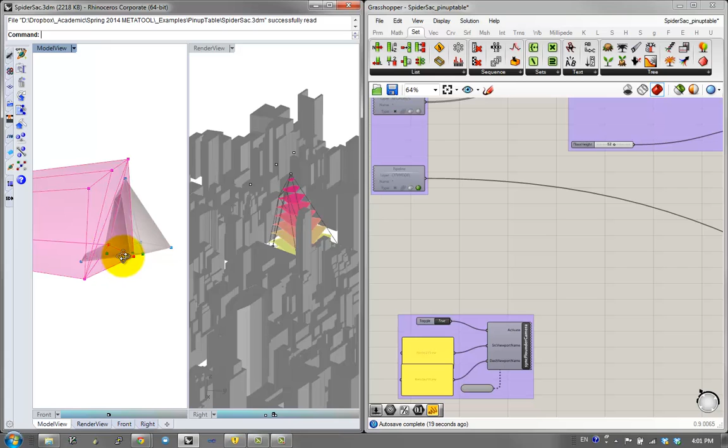Okay, so for this what I'm going to talk about is, I'm going to make a tool that's entirely for representational purposes. And I'm invoking a little bit this kind of pin-up presentation or table in which many iterations are placed in comparison to each other so that you can kind of compare and contrast and display your process. On one hand, it's a very simple tool conceptually.

It's a tool to essentially bake your progress, but it's also a very helpful tool in terms of representation. And since this set of videos is entirely about representation or harnessing the power of representation within the creation of tools, I think it's especially relevant and kind of a great base with which you can work and use your tools.

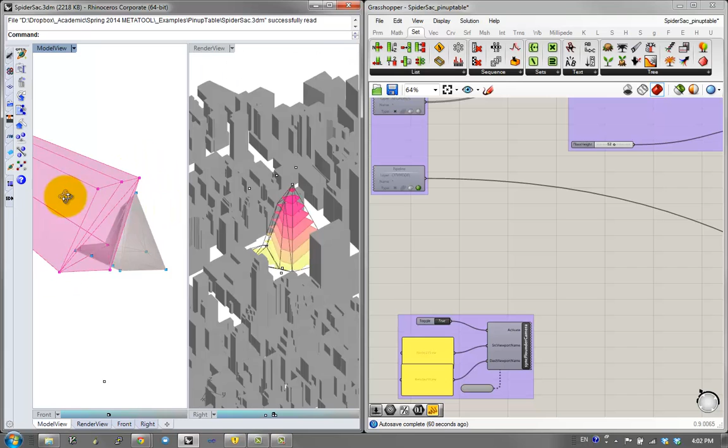Okay, so I'm starting from the SpiderSac example, which is an example that uses geometry to kind of carve out two volumes from each other, do some analyses. But really, what I want to do is to create a way in which I can work with a lot of iterations. Because the problem with this is that I can do a lot of different versions, but I don't know exactly what I've made, and it'd be great to compare and contrast.

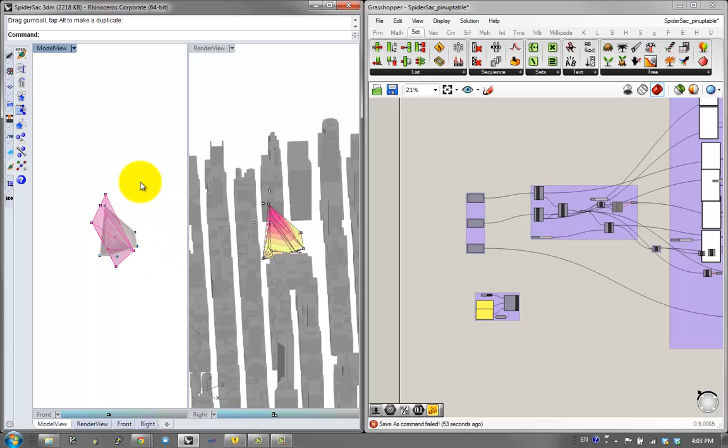So what I want to do is I want to make a button within the interface of Grasshopper or Rhino, and if I click on the button, I want to be able to have both the geometry and any analysis placed on a table. And if I click on another button, more geometry will be placed on a table. But I don't want to have to go and move anything or fiddle around with anything. I just want to be able to kind of play around here, make, place, make, place, make, place, and then later go to this table and kind of see what exactly I've been doing.

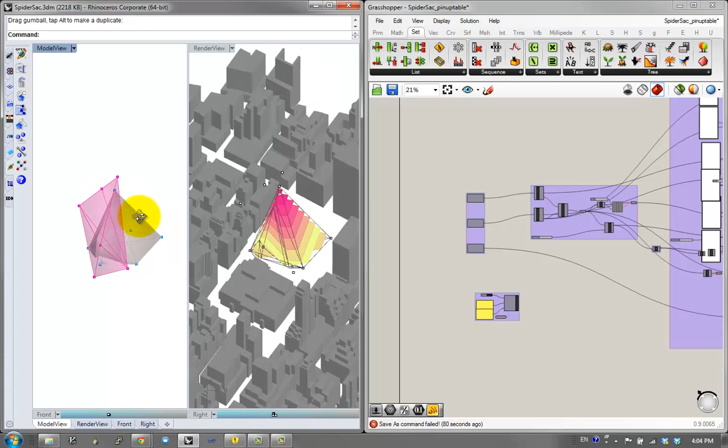Alternately, what I could also do is I could, in fact, have these objects already placed on a table. So I could get rid of the city model here, and I can kind of move this geometry, place it, and then move to another portion of the table, place it. And that's actually the version I'm going to be showing here. It involves a little bit more interesting work with the camera, but I think it'll be very helpful, and it'll also kind of show you an insight into how you can use the Flounder camera control as a tool to kind of manipulate geometry in new ways.

Because here what you're seeing is I'm looking at the same point in space, I'm looking at the same geometry and just hiding and showing things. In this example, I'm actually going to be showing two different locations in space that are in separate areas but are made to look similar. That's a little vague, so let's actually go on to executing what I'm talking about.

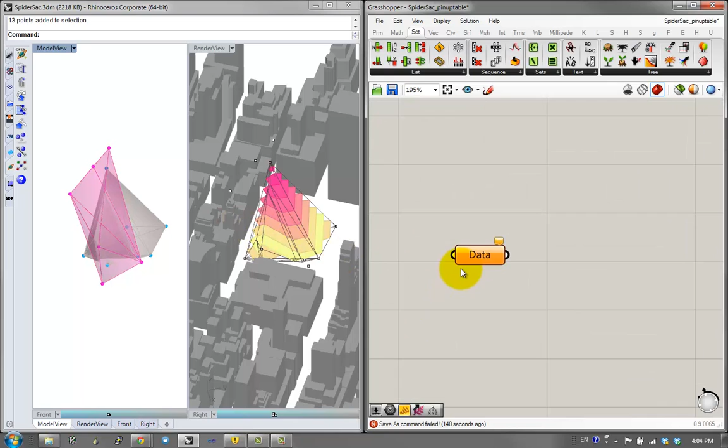So first of all, I'm going to write some pseudocode. Again, I think this is great practice, and to think about what I want to do. So I want to be able to define a table area. And then I want to say, okay, define kind of the spacing of my table. Now this may be random. This may be automatic, but let's just say that I can define a spacing and it can define a grid. So define spacing for my table to create a grid.

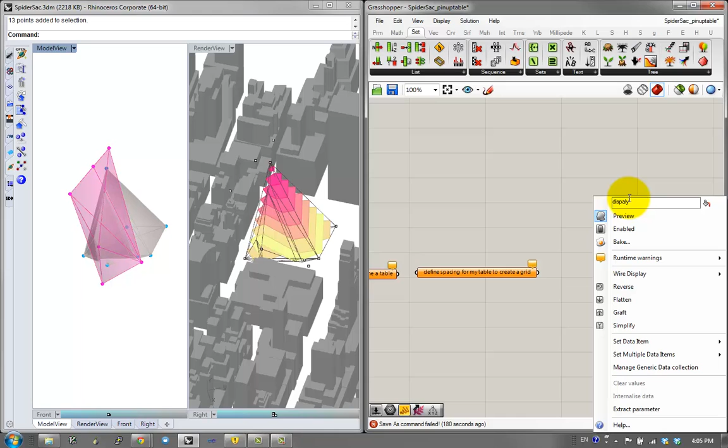And I also want to then display. I want to display the geometry or analysis or the tool results on the table. I want to have a button that bakes geometry. Create button that bakes geometry. And let's see, I want to define a table, define a spacing, display the tool results on the table, and to create a button that bakes geometry.

But moreover, I want to display the tool results on the table, moving the results around like separate objects. Great. So this is a little vague, but we'll get into exactly what that means in a second. So first of all, I want to define a table.

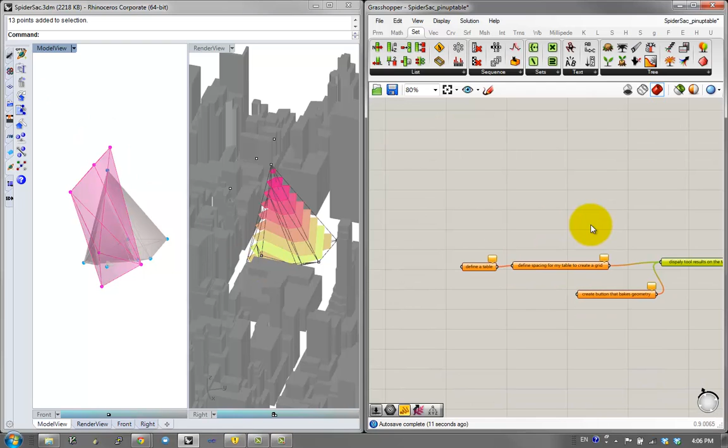Okay, so I'm in the SpiderSac world, right? And I'm going to, for the time being, bring up the viewport view so I can see what's going on. So I'm in the SpiderSac world, and I'm actually going to make a table way far away over here. And as you'll see later, it doesn't really matter where the table is. It just matters that I can't see it. So here's my table, let's say. And just to be tongue-in-cheek, I will make an actual table.

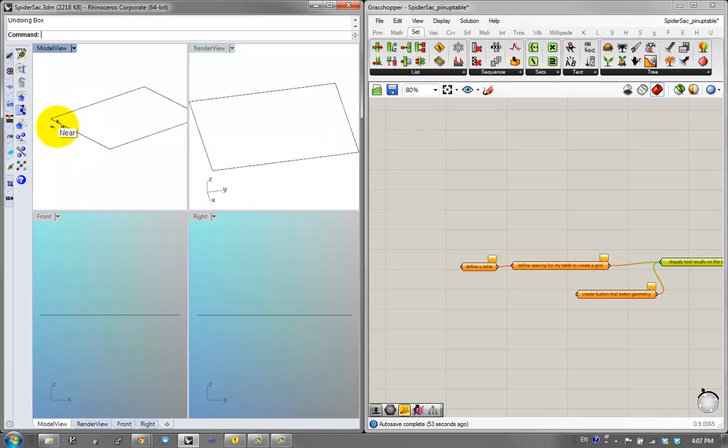Or I'll just make a box. This will just be a podium, perhaps. Or actually, you know what? I will actually make a table. So I'm actually going to make a table. It's a little bit tongue-in-cheek, but part of the point I'm trying to make is that the representation of what the tool does is very important, and in some ways will affect the way you design.

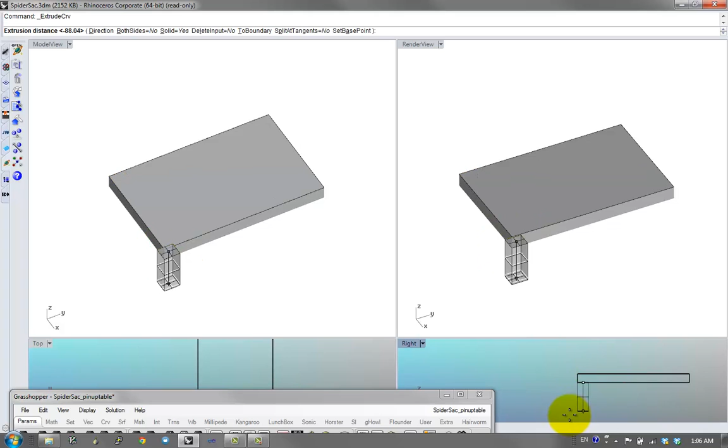So creating this table on which we have our geometry is actually a good way not just to showcase what we've done, but also, while we're designing, to tell us more about what we design and how we can design. In the way that any pinup or any crit in general in studio is a good way to influence design. It's not just a representation, or a unidirectional expression of information. It's a way to kind of resynthesize information.

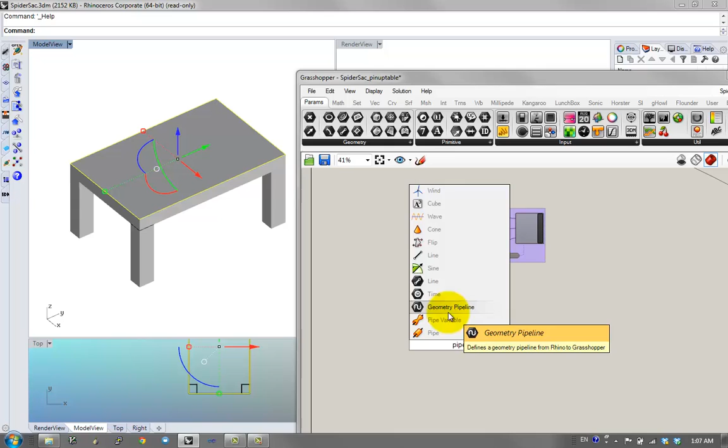So I've created a table, and the table is just for display purposes, really. And I've also created this curve, and I've created a layer called table. What I'm going to do is grab this top surface, or this curve, with a pipeline object, geometry pipeline, and I'm going to say grab the layer table. I'll specify that I'm using curves.

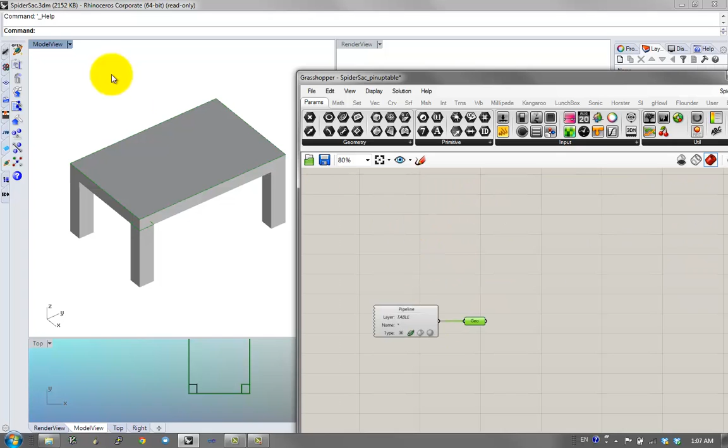So when I pipe it into a geometry component, let's see. Oh, I think table is in all caps. You can see I'm grabbing the table. That's great. So in some way, that's akin to part of the first process in our pseudocode, which is to define a table and define spacing for my table to create a grid. Display tool results on the table, and use that together with the base geometry.

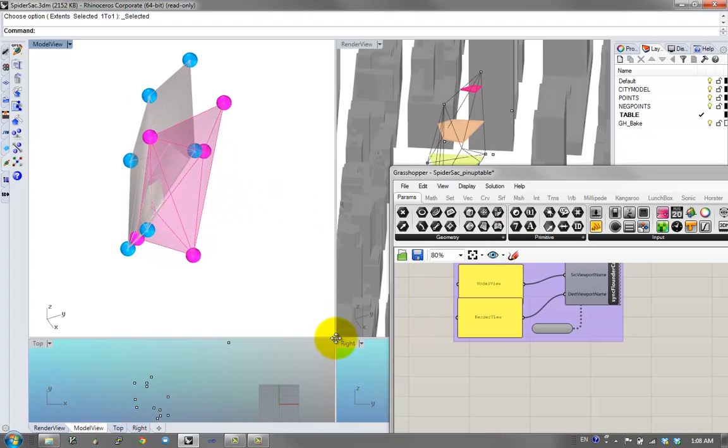Now I'm actually going to jump ahead, because it's not always necessary to go in order of the pseudocode. I'm going to go into the last one and talk about what it means to display the tool results, so that you can see what exactly I'm talking about when I talk about using a table or a pinup table. So if I go back, I'm going to turn the camera syncing on by turning on the timer. If you go back to this example of using the Flounder camera, I want to emphasize again how effective having this split camera is.

It's not just a way to show information. It actually lets you use Grasshopper like a tool, because you're not hiding and showing preview objects or custom preview components. You can actually edit geometry while you're looking at the end effects. And I noticed that some of you might have been using only one view without implementing the split view, and I'd encourage you to try to implement it, because it actually does change your workflow.

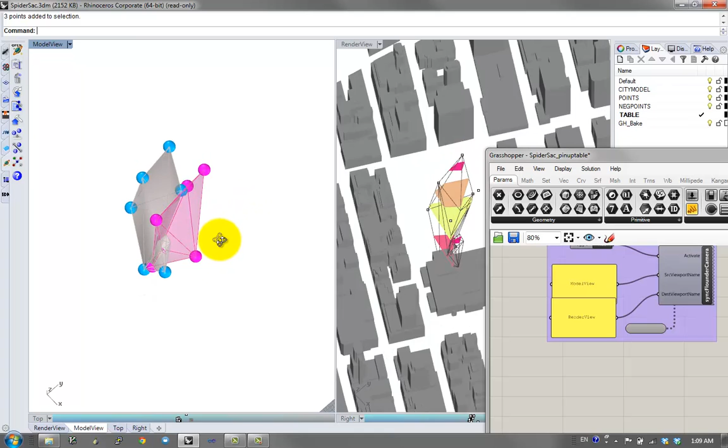In any case, the Sync Flounder camera, as you know, syncs between two views; it grabs information from here and implements it into here. And we can also replicate this functionality by using the Flounder components that I've created. There are also two other components: get camera and set camera. And these two components, you can chain them together to do the same thing. So I'm actually going to delete this component here and try to implement this again.

So what getFlounderCamera does is, given a Boolean and given the name of a viewport, it'll give you this information on the right, which is the location of the camera, the target of the camera, the lens of the camera, the focal length, and up. The location is where you are, so it's the location of the camera from your vantage point. The target is what you're looking at; you can see the dot here. It's almost always in the center of the screen because it's the center of what you're looking at.

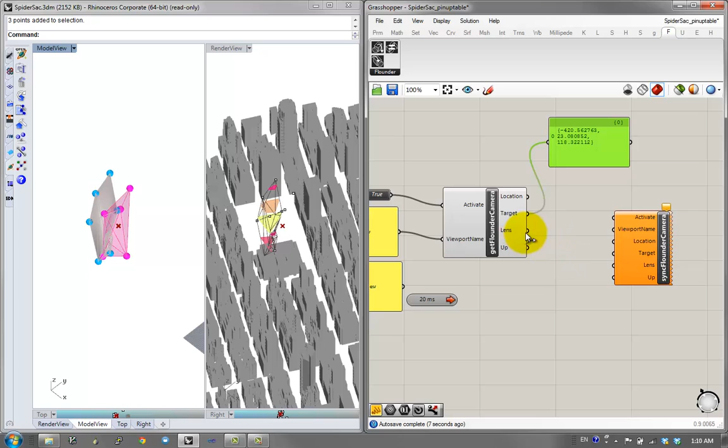The focal length, if you know anything about photography, is using the focal length of 35mm cameras as a model. The long and short of it is that the larger the focal length, the more orthogonal or axonometric-like objects will appear. If I use dolly zoom in Rhino to change the perspective and have these distortions, the focal length will become very small. And if I plug the timer into here, you can see that the focal length is like 1.25 now.

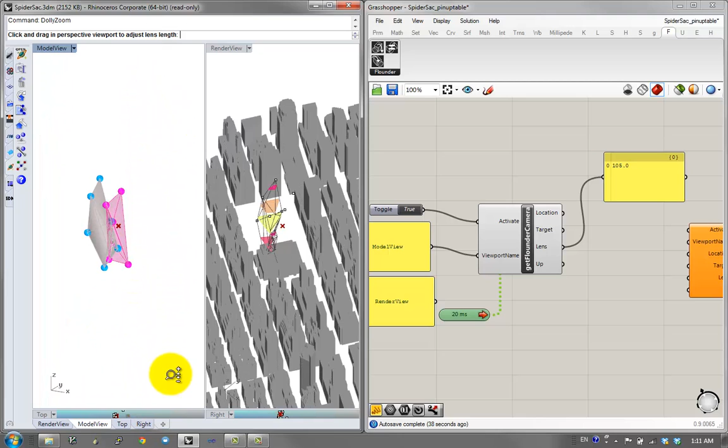So the smaller the focal length, the more distorted or the more wide angle you get. And the up is the up direction of the camera. Now, sync Flounder camera is the opposite of that, as you can imagine. I'm going to connect this to the timer, so this also updates.

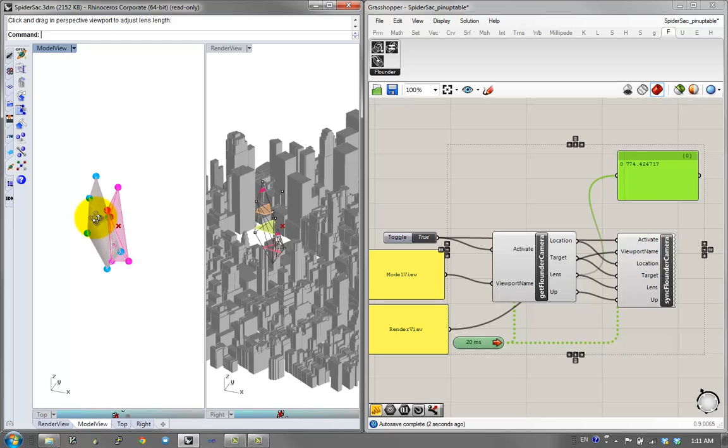If I give it a Boolean, and if I give it a viewport name, and if I plug in all of these variables into here, then it'll take this information and sync this viewport to match this information. So now that I've taken the information from model view and plugged it into the camera information from render view, you can see it's together. And this is replicating the functionality of the sync Flounder camera up above.

Now I think there's a small bug in that this appears to say sync Flounder camera. It really means put Flounder camera, and I'll fix that in a future release. Now one thing I want to talk about, and this is the point of this tutorial, is I can also move where the camera is pointing at and where the camera is looking from in order to sync the movement of the viewport while looking at a different location. And I'll show you what that means.

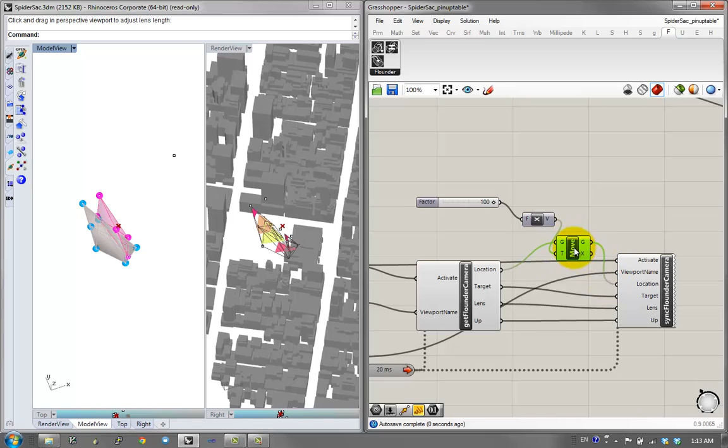Let's say I'm going to move everything 100 units in the X direction, and I'm going to plug this into a move component. I can move the location 100 units to the right, and I can plug it into here. And I can also move what it's looking at 100 units in the X direction and plug it into the target. And you can notice that as I move this point, my camera on the right-hand side shifts. But if I orbit, I'm orbiting around this new point on the right.

And so I'm going to modify my slider here to say 500 so that I can move it a bit more so you can get an even better understanding. So you notice that on the right-hand side, I'm orbiting around this new point even though my geometry is around the old point. Now the reason why this is interesting is that the camera is not the only thing I have to move. I can in fact move this geometry over here, and I can also move the mesh over here too for many reasons.

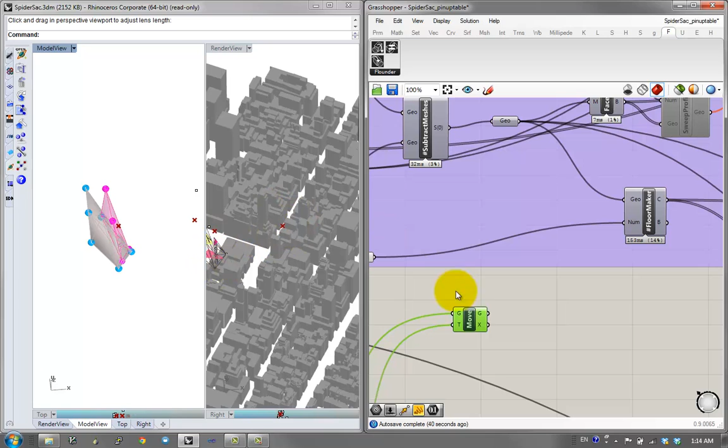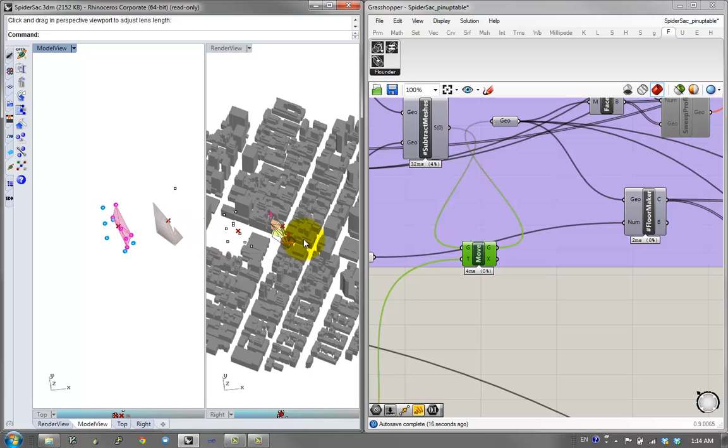It's over here. Looks like there's a little bug I'm going to fix. I think it's because the custom preview object is showing the preview in the wrong location. Or no, it's showing it in the right direction, but it should be showing it over here and not moved. So I'm just going to go in and edit that. Excellent, so I fixed it.

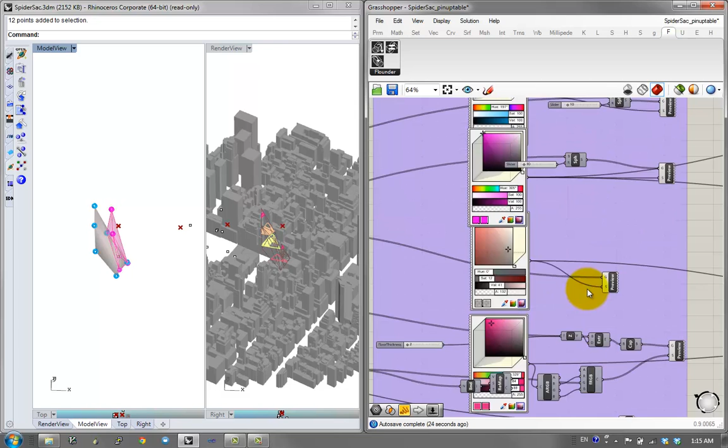So now what does this mean? It means that I'm selecting these points, but really they're over here. But what I'm looking at and what I'm orbiting around... and I'm also going to hide the city just for a moment, which I think is these items. No. Okay, there are these items down here. I'm going to hide this preview object.

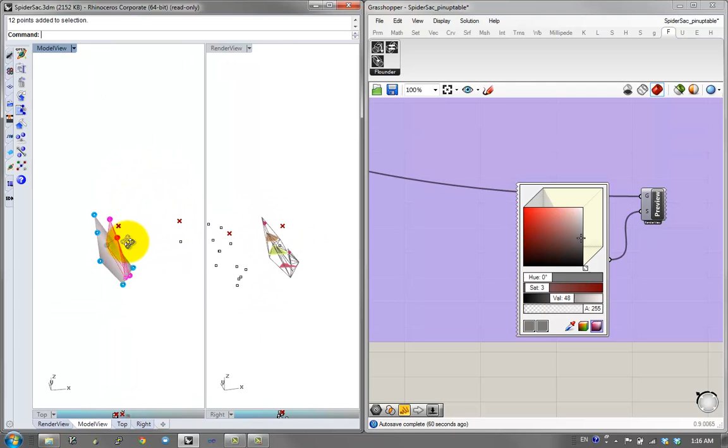Okay, so if I'm rotating around, it looks like nothing has changed, but when I highlight these objects, these points are actually in XYZ space in a different location, or this geometry has been moved, but it feels like it hasn't. And this is important because instead of having all this geometry move in the X direction by this many units, I can actually move them onto the table. I can move them to a far-off location. It'll still feel the same, yet I'll be operating on a different surface, which then lets me make copies or bake geometry.

So by now you should be able to understand that, and I'm going to show you this in a top view, in a plan view. So if I highlight these points, the points I'm highlighting are around here, but the geometry that I've created is offset. I hope that's pretty clear. Okay, great.

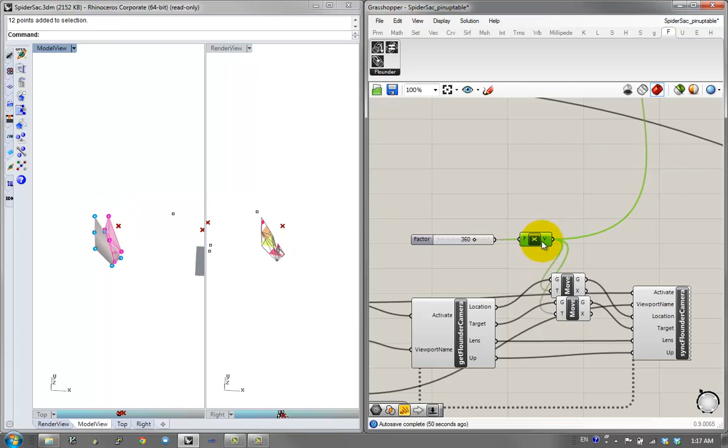So now what I'm going to do is the same operation, but instead of moving this to an arbitrary point, I actually want to move this onto the table, somewhere onto the table. So this is great, and I'm actually going to pause this, and this is kind of the displaying the tool results portion.

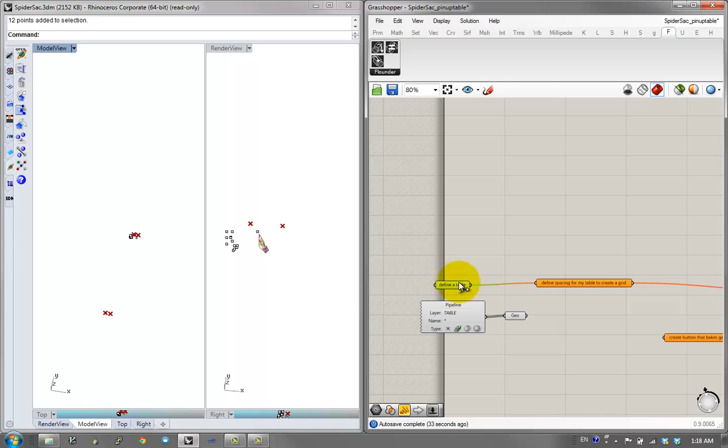So I'm going to pause this, and I'm going to go back to creating a grid upon the table. And I apologize for jumping around, but I think it's important to understand that I've created this aspect and I've created this aspect. So I'm going to actually move my pseudocode around to match. And now it's kind of a way of growing in both directions to try to figure this out so that I can use this object that comes later in order to connect with this object or component that comes earlier.

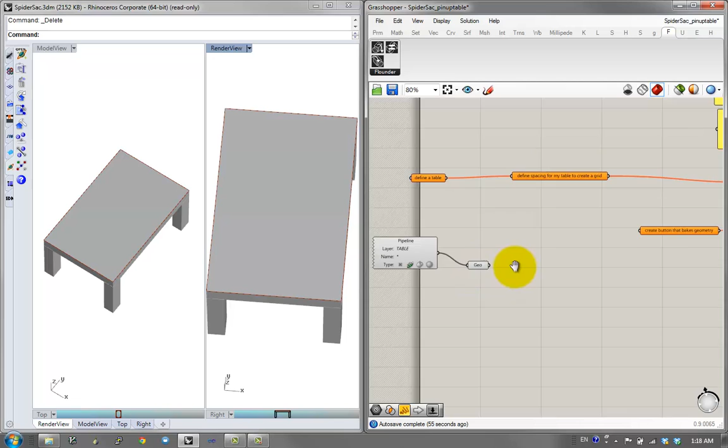So I'm going to go back to my table, which is a little hard to find, but it's out over here. Excellent. And if you remember, I had the pipeline grab the surface of the table. It looks like there's another curve here that I'm going to delete. Great. So I'm going to define my spacing for my table to create a grid. There's a few ways I can do this. I can divide a surface, and I'm actually going to use this. So this divide surface divides it into U and V

surfaces, and the U and V is that each surface has an internal orientation, so U and V axis, and it divides them along with these number of segments. Now I don't want an arbitrary number of segments. I want to get the dimensions of the surface and get a point grid of an ideal size. So I'm going to grab the dimensions of the surface. And this says your surface in one direction is 710, the other direction is 1100. And I'm also going to make a resolution slider. So maybe my resolution is like 80.

And I'm going to divide each dimension by 80, which gives me in one direction 8.88 and in another direction 13.85. Now I can plug these directly into divide, and Grasshopper is smart enough that because it knows I'm expecting an integer, it'll round for me. So depending on the resolution, I can change how many points I want. This is great. The other smart thing I could do is, if I'm using the analogy of a pinup table, I don't want my objects to be too close to the edge.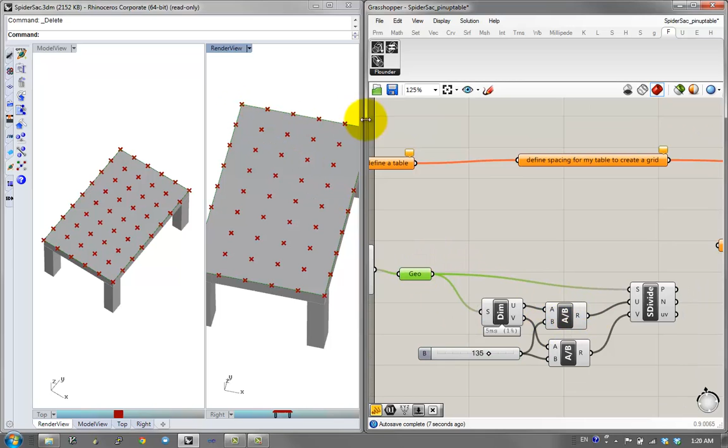So I could either think about removing all the points around an edge, which I could find the points closest to the edge and delete them. Or I could do a very fast thing: I could modify the initial line that's being used to instantiate the points. So I'm going to say offset. I'm going to grab that curve and offset by a little bit. Let's see. I'm going to offset it in the negative direction. So I could either modify this to be negative, or I could just use the negative component.

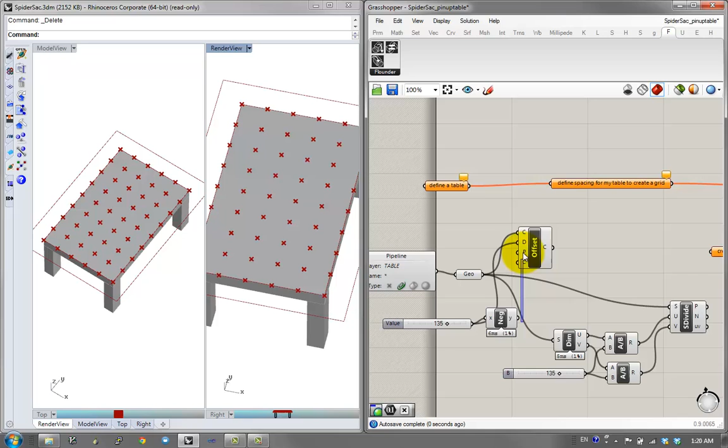Okay, so now I can say only make points inside of this. So I get an offset from the edges of the table. And then I can use this to subdivide and understand the dimensions. So that's pretty convenient. And let's say that's my rhythm, my spacing. So great. Now I've defined spacing for my table to create a grid. And I can cluster this, but I can also group this so that I can visually separate these out. And I'm going to hold Alt and move it out so I can stretch this separately so that the pseudocode makes more sense.

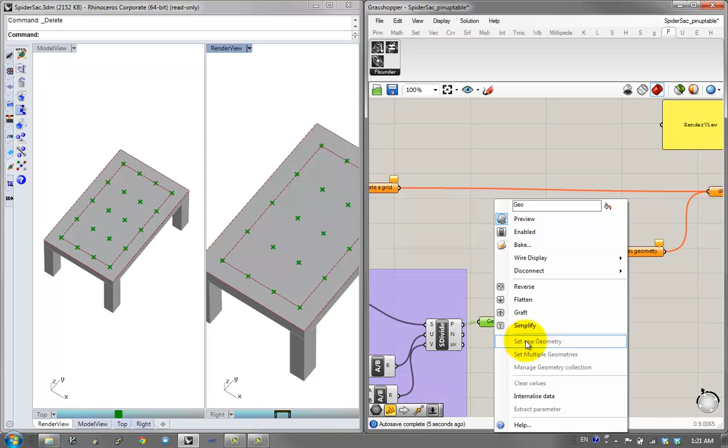So I've created a grid, and I'm going to grab this geometry. And I talked a little bit about trees earlier, but I'm also going to just flatten this component so that I just get one long list. I don't want any complications. Okay, great. So just for the sake of connecting this process together, because I've created a grid and I now want to display the tool results. But I want to display the tool results on one point, and I want to continue along the other points.

Now, a good practice in Grasshopper, if you're dealing with a lot of data and you're trying out something for the first time, is to try it out for the first iteration with one item instead of trying to do everything at once. You try it out with one item. So right now I'm just using this list item component to just choose one point.

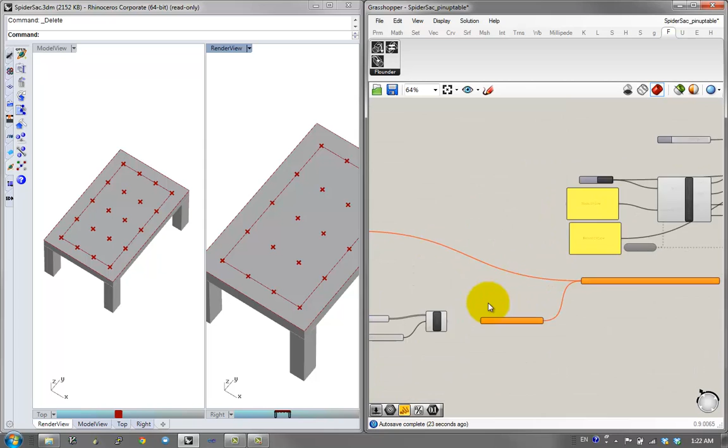And now I'm going to try this aspect of displaying the tool results on the table. Now, I already have done this earlier, right? In fact, it's right around here. But what this does is this has moved our interface or the analyzed geometry in the x direction. We want to do something similar, but instead of moving it in the x direction, we want to move it from the location of the interface to one of these points, specifically this point.

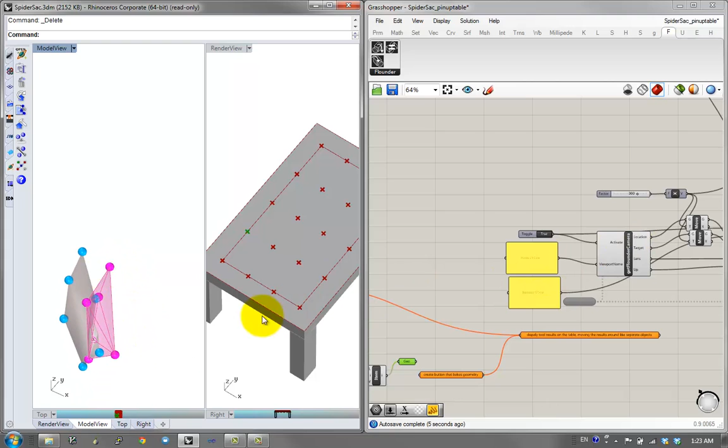Now, how do we do that? First of all, we can figure out where we're looking from, where this is starting from and where this is going to, get a vector between the two, and plug that vector instead of this x vector into all the move components. So then the first question is, okay, where are we looking from, or what's our source?

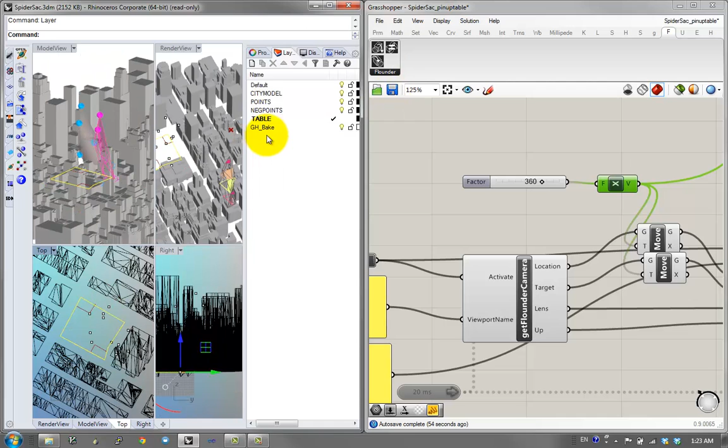So this is our initial geometry, and if I do a show, I just showed the hidden geometry inside of it. I could perhaps go into top view and inscribe a rough site. I'm just doing this arbitrarily, but you may actually have a site. What's actually happened is this is on the table layer, so we don't want that. I'm just going to put this in the city model layer, actually. Great. And I'm going to also use set points to make sure that it's entirely flat, so all the z values are here. Okay, excellent.

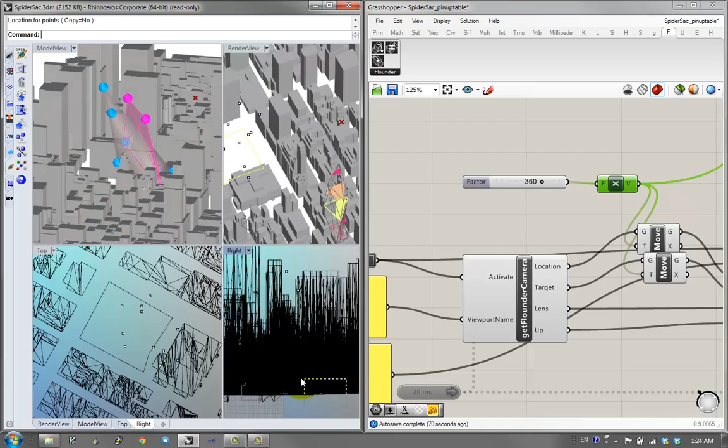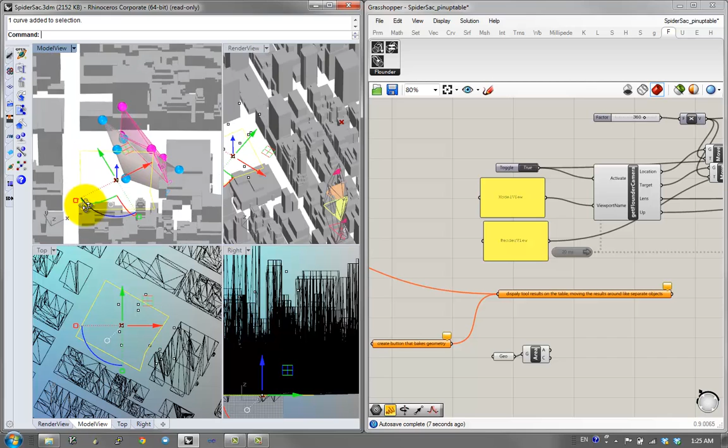So if this is my site, then it does look like much of this building that I've created is a little bit floating in midair. But I'm going to designate a center point for this site. Actually, I'm going to grab this geometry and enter it into Grasshopper. I'm going to use the area component to find the centroid of that site. What I'm essentially doing is creating a stable site from which this entire geometry will be copied. So now I have the geometry, and I have the point from which everything is copied.

And then I'm going to use vector 2 points because I'm going to copy it from here to the table over here. And that movement vector is really this value. Okay, great, this is the value I want. Now I want to move my analysis, instead of in the x direction, using this vector. So I'm going to plug it into everything that x used to be pointing into. Delete that. And you can already see that it's worked to an extent. So this geometry has moved over here.

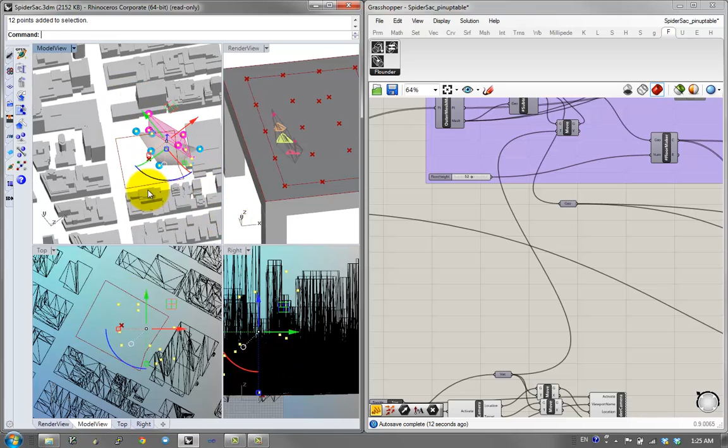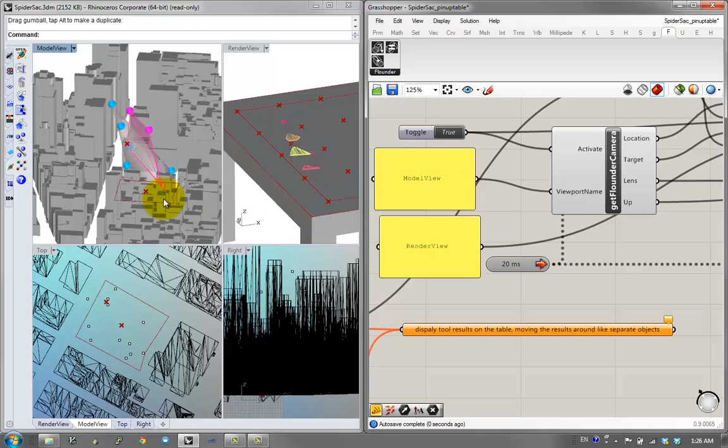And I'm going to take this and lock it, so I don't accidentally select it. And I'm going to select my points and kind of move it over. So great, now you can see that it's been moved over here. And if I turn the camera sync back on, even my camera is rotating around the table, which is incredibly convenient, and also incredibly fun. And instead of locking this geometry, what I can do is go back to my preview object, and this time show this geometry, but not in the render view, in the model view.

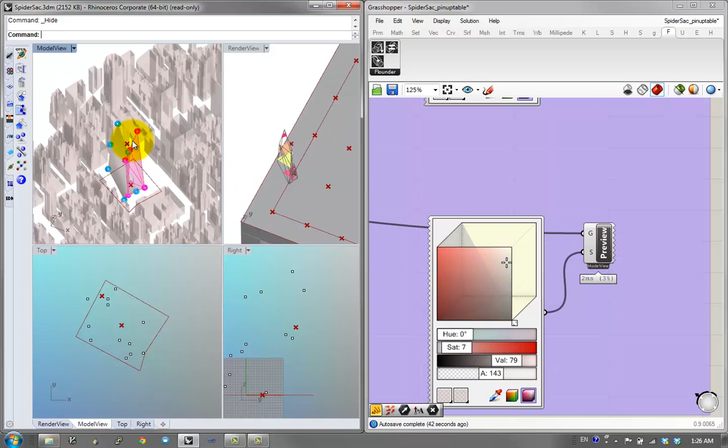So I'm going to make this transparent. On the left-hand side, I'm modeling a new building. On the right hand side, it's being placed on a table. This is actually a lot of fun.

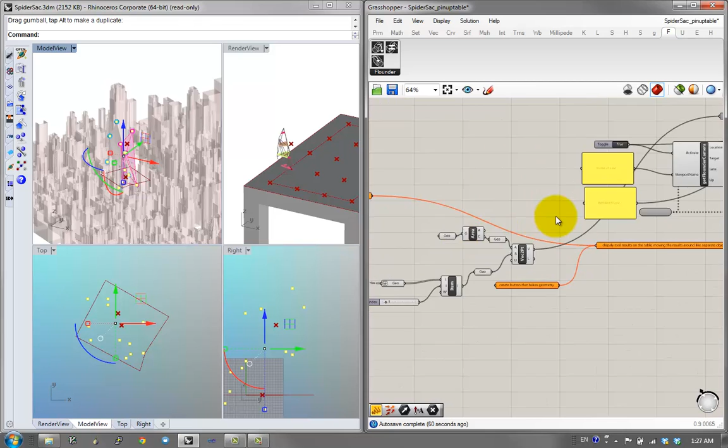I'm going to hide the things that are not relevant to me, so a lot of this geometry. I am, however, going to show the dots just for right now, so I know where my geometry is going.

Now the last thing I want to do, and the core functionality, is I also want it to be able to bake and move on to the next point. This is going to be a little bit of a hoop. I'm going to disable camera syncing right now because it's slowing down my computer. This is a little bit of a hoop one has to jump through.

What I'm going to use is the button component. If I show you a panel, when I hold it down, it goes to true. When I let go of the mouse button, it reverts to false. I'm going to call this the bake button, or the iterate button actually.

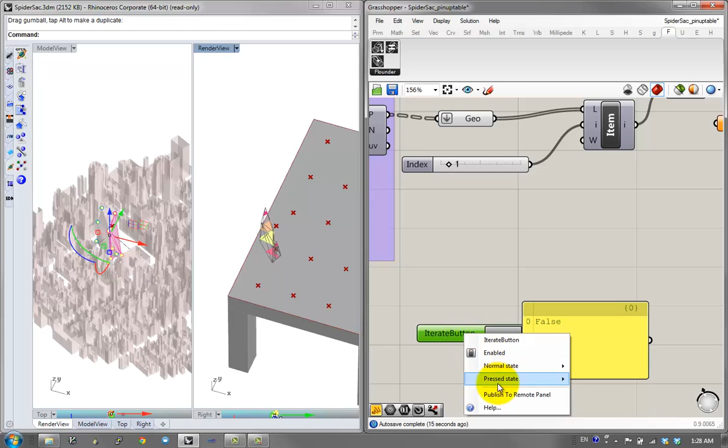I'm going to publish it to the remote panel, which you can do with buttons, so that if I go to view and show the remote panel, slide it into Grasshopper, you can see I have the iterate button over here. I'm also going to make it into its own group so that visually we know this is an important thing. So how do I use this to iterate over this grid?

Well, there's this other component called data recorder. If you give it a bunch of data, it'll record that data. This means that it's recording. I can turn it off, I can turn it on, and this can clear it.

If I click, it'll just keep on recording data, and you can see that if I put a slider into it, it just adds onto the end of this data. So I just cleared it. If I move, it'll just keep on recording the data, which is convenient.

But we don't want a slider, we want the button. Another thing is that if you click on it, you notice that you get both a true and a false.

Now one thing we could do is say, okay, I just want to capture how many times it's happened, how many times I've clicked on it and gotten a true. So one thing I could do is say equals, when is it equal true, Boolean. I want to count the number of times it's equal true, and it would give me a bunch of false, true, false answers. But that's actually kind of the same thing as what I would get in the first place.

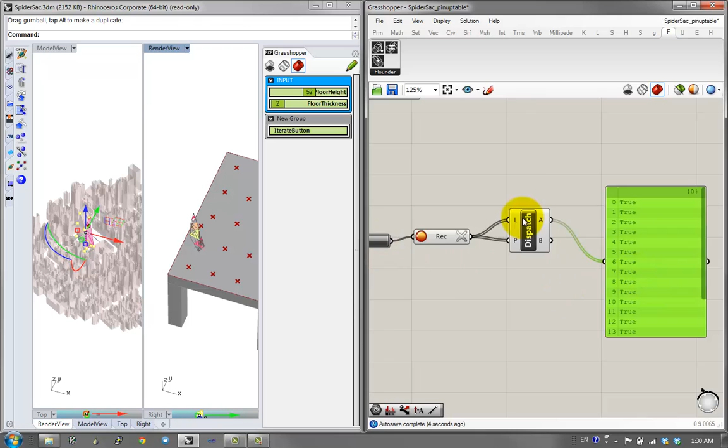Essentially, I have 9 true values. If I click the button, I get 10, 11, 12. This is exactly what I want. And then if I count the length of the list, I get this kind of counter.

So I'm going to reset it, and I click on the iterate button. 1, 2, 3, 4, 5, 6, 7. This is great, I'm getting a little counter. This is wonderful. And then I can reset.

Now resetting makes it null for some reason. And if I click on it once, it turns into 1. So let's also add a kind of failsafe.

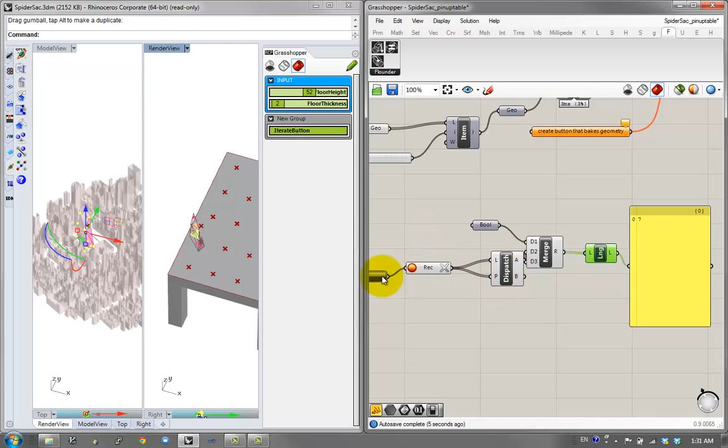Or not a failsafe, just a kind of default, so that I'm going to merge this stream and this stream so that it always has a true value in it no matter what. So then if I empty it all together, it starts at 1, goes to 2, 3, 4, 5, 6, 7, 8. I could also subtract 1 from this length.

Whoops, use the number 0. And that would make my counter start from 0, 1. Whoops, I should subtract 1. It would make my counter start from 0, 1, 2, 3, 4, 5, 6 over here, which is what we want because lists in Grasshopper start with 0.

In fact, this is a little messy, so what I'm going to do—and by messy I mean when I look at this, I don't immediately know what's going on—I'm going to grab all of this.

I'm going to make it into a cluster that just says record to index, or I say record to counter. Actually, that's a little bit more expressive—record to counter. So now we have this cluster component that will iterate from 0 onwards based on how many times we click the button.

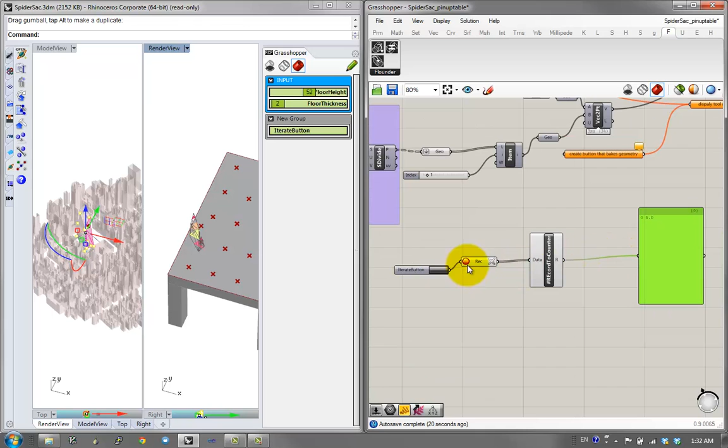Remember this portion where we're using the list item with the first, second, third, and fourth point. If I plug this counter in here instead of using the slider, I can just move which point my model is on. You can see it moving alongside a table, and this is great. If I click again, it wraps around because the item wrap index is true.

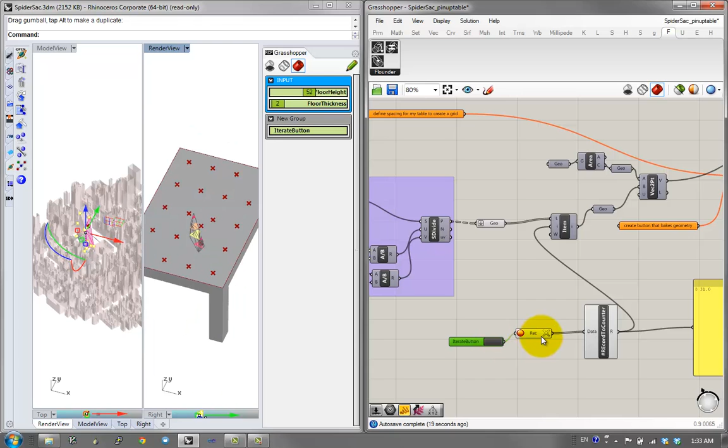Now the problem with this is, it's great, but I also want to leave behind a version, and what I want to do is bake that Grasshopper geometry.

In the SpiderSac example I might have explained this, but there are a few ways you can do this. Lunchbox has a bake component, which you can also download as another plugin. There's also a person called Giulio Piacentino, who now works for Rhino, who has a bake attributes component. It's on this page, Grasshopper Tools in C#, so you can go find the bake attributes component there.

You can click on this, 0.82, the most recent version, download it, and then grab what you've downloaded and drag it into the Grasshopper window. You'll get this example, but really what you want is this at the end. So I'm going to copy, paste it back in here, and if it shows up somewhere, I'm going to drag it over.

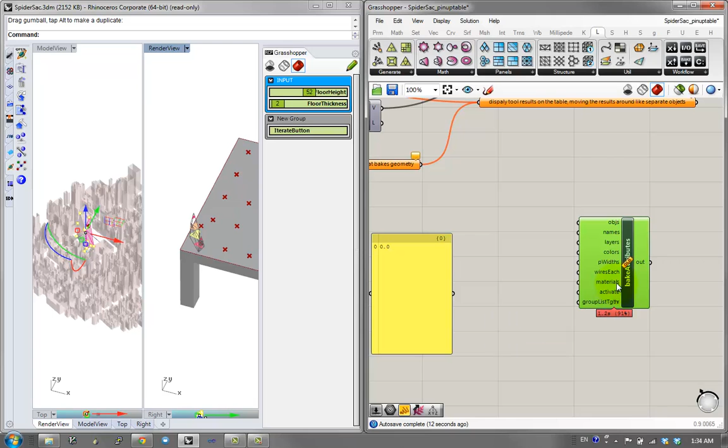So what this essentially does is, given a bunch of inputs like objects, names, layers, and an activate toggle, it'll bake the Grasshopper geometry with a certain color.

In this example, I've already set this up, but I'll do it again since you haven't seen it. First, I have to choose what I want to bake, and the bake attribute is actually very similar to the custom preview attribute—the custom preview component, which you should be using all the time.

The custom preview component receives as input a geometry item and a shader or color. These don't all have to be filled, but it also takes in an object and a color, or a geometry and a color.

So what I want to do is take this analysis right over here—I need to move the floor height a little bit—and instead of this preview, I'm going to plug the objects and the colors in similarly.

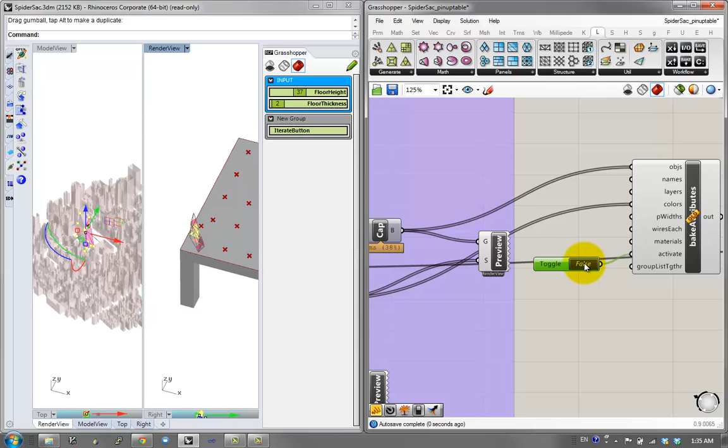Now I'm just going to demonstrate this for you. If I plug in a toggle to activate and click true, go out of it, and close Grasshopper, I have actual geometry.

You can see I can click on this—I can't click on the wires, but I can click on the actual geometry. This is real. And I'm going to undo the bake, so this is kind of what I want.

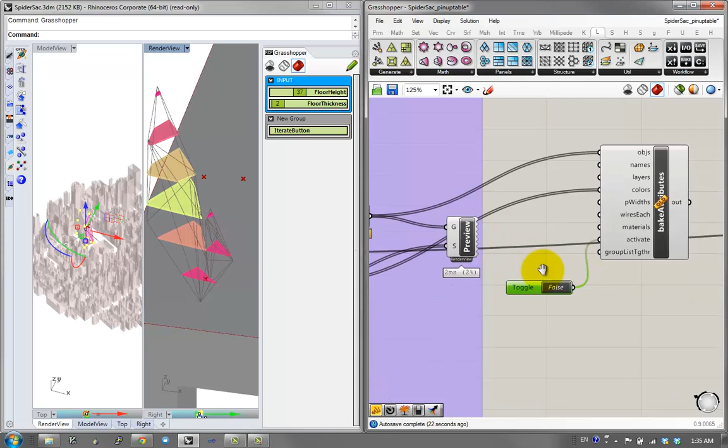What I also want is the outer bounding box of it, and I also want the wires. So I'm going to copy and paste this again, and grab the display object—this one creates the volume of the geometry with a given transparency.

And I like this, so I'm also going to take this and copy the inputs that have been plugged into here—the colors—and this preview grabs the objects from here, so I'll input the objects over here as well. Lastly, I also want the wires, not the city, but the wires being used to illustrate the mesh—that's this one. So I'm going to copy and paste to get another one over here.

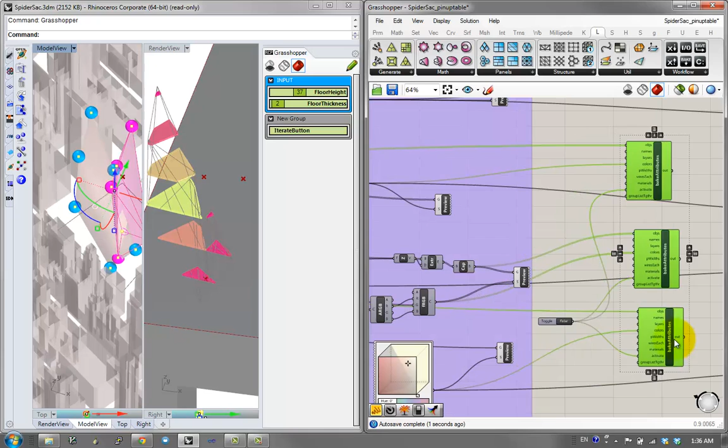Plug the shader object into the colors, and plug the resulting geometry into here. Excellent. So now I have these three bake attribute functions that are all plugged into this Boolean. And I'm actually going to clean this up a little bit by using a Boolean component.

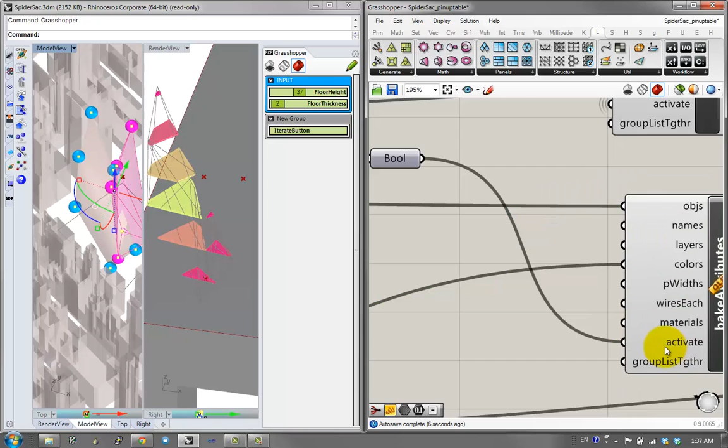I plug this into the Boolean, plug the Boolean into the activate component. And if you're noticing why this disappears, it's because this is set up - if you right click, you can choose the wire display. Default is our normal version. You can choose faint, which is slightly hidden, thinner and more transparent, or hidden, which exists if you click on it, but when you don't, you see this radiating antenna-esque, transmission-esque symbol that's connected to here.

So now what I'm going to do is select this and move it down over here. Maybe you can see where this is going, but I want to activate this baking every time I click on this button. So I'm going to connect this into here. And this is actually not going to work on the first try, but I'll show you why and we can talk about it in a second.

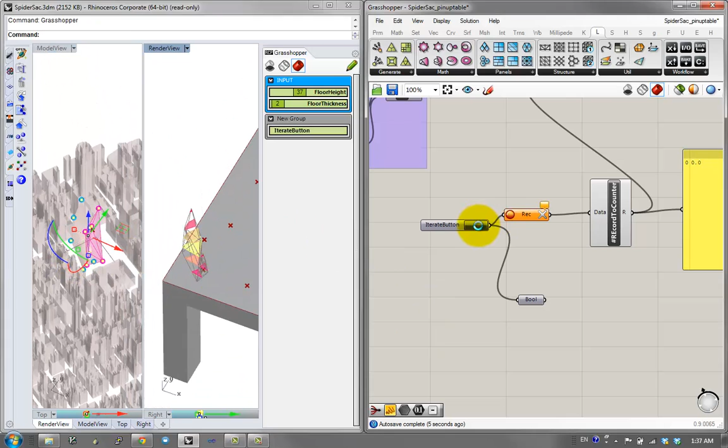So if I click on it, I have baked, but where have I baked this? Well, first of all, I've baked this geometry over here. Second of all, I've baked the geometry over here into my new spot. And this is all wrong for many reasons.

I'm going to undo, and I'm going to solve the question of moving that initial geometry. What I really want is I want to move, I want to bake this geometry over here.

Excellent. So now if I try out that button, great, now you can see that it's baked around the new, onto the table. But the problem is, that's not what we wanted. We wanted it to bake and then to move over.

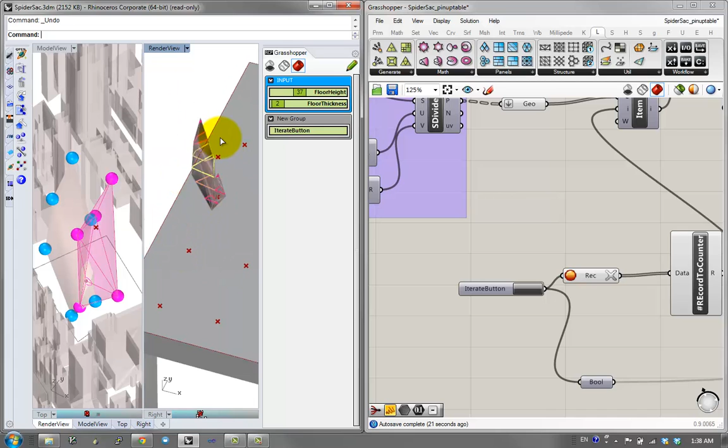Now the reason why it's doing that is the moment we click it, it's changing this data, and this changing this point, and then the baking is going to bake onto that point. So we want this to trigger before this triggers. How do we do that?

There's this function called data dam, which delays data. So I'm going to create a panel and show you what this is doing. Here's a slider. So I'm going to set this to 0.25 seconds or 0.5 seconds, so there's a slight delay. If I change this to 10, it'll move to 10.

If I change it to 0, it'll change to 0, but there's a little delay. If I set it to 2 seconds, if I move this slider to 8, I need to wait a bit for this to change to 8. So this essentially delays something firing or a message coming through.

So I can set this to say 1 second, and instead of the slider, I'm going to feed it this button, which means that when I click it, this won't change for about 1 second, and hopefully that's enough time for the geometry to bake before it's moved on.

Actually, sorry, that's the other way in which we want to do this, because we want to bake first and then move second. So what I'm going to do is I'm actually going to put it over here.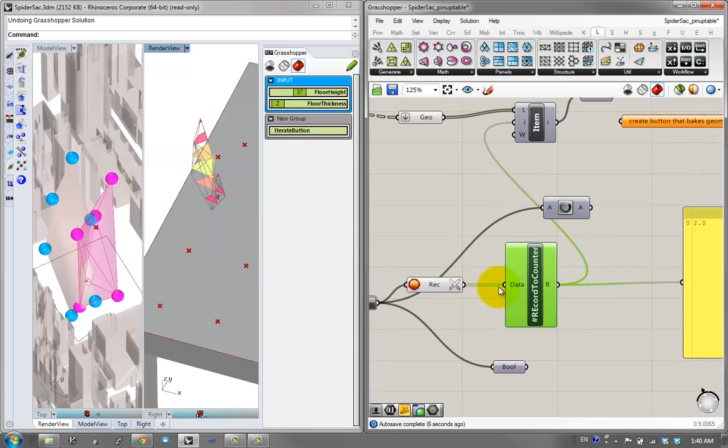So that we can send the signal to the item counters later, so that it goes through, it records the data, processes the data, but then it sends the counter data a little bit late. So it bakes first and sends the counter data late. So if I click on it, it's baked and then it moves, and now you see that happening.

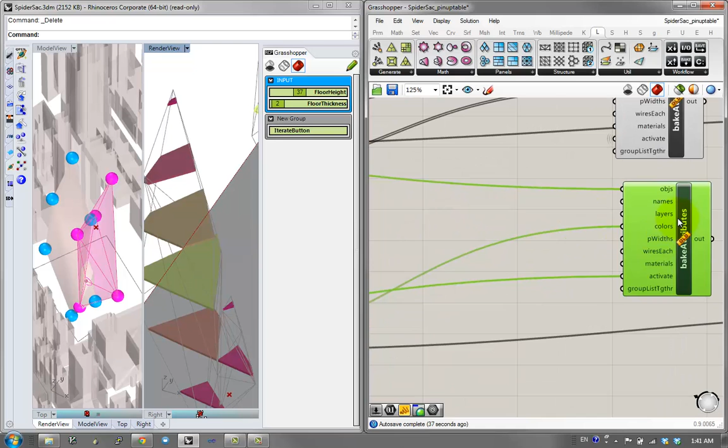And whatever it's baked, it's pretty opaque and I can't see inside. So for the time being, I'm actually going to disable this bake function because for some reason the alpha channel isn't quite working right. So I'm going to disable this one.

So now you can imagine that I go over here and I move some geometry around. And then I can click this button and it bakes and it moves over to the next point.

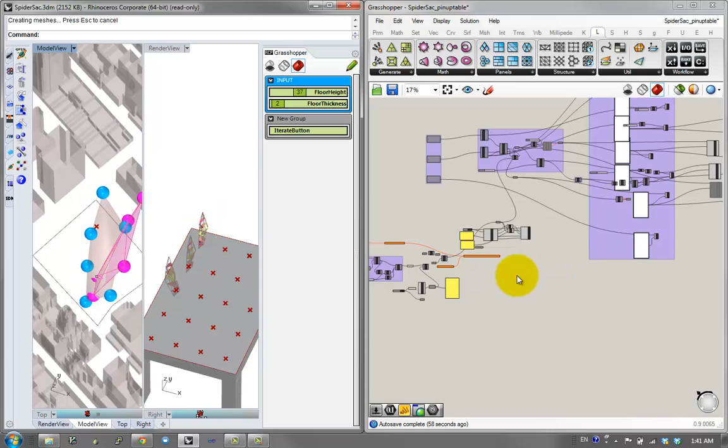I'm going to clean my script up a little bit by hiding everything that's not being used, and I'm also going to turn the camera sync back on. And I'm going to maximize Rhino so now you can see what's going on.

I have this table on which I am making geometry, and the type of geometry I'm making is being analyzed and shown, and I can change the floor height.

Let's say over here I change it to have something that's pretty dense. And let's say I also decide that I would kind of like it for my geometry to touch the ground. Let's try that again, I think the copy didn't quite come through.

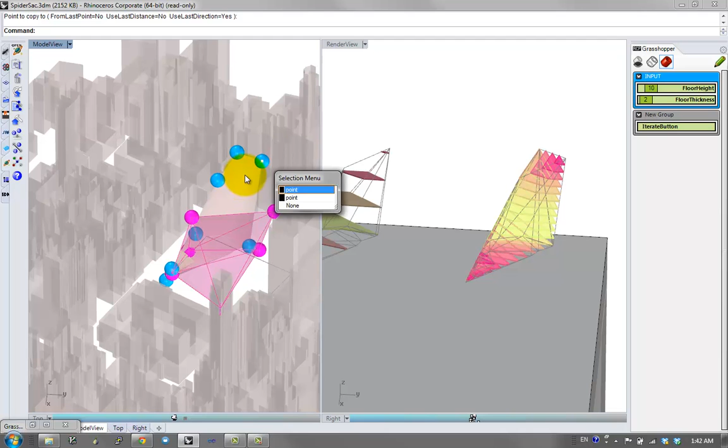Excellent. So I could say, oh, that's interesting. I'll iterate onto that. So I've baked it and I moved over. And if I look over, you can see there's my geometry. So now I'm kind of continuing. Well, this is nice, but let's say, oh, I need more of a void. So I'll grab that dot and I will say, move it over.

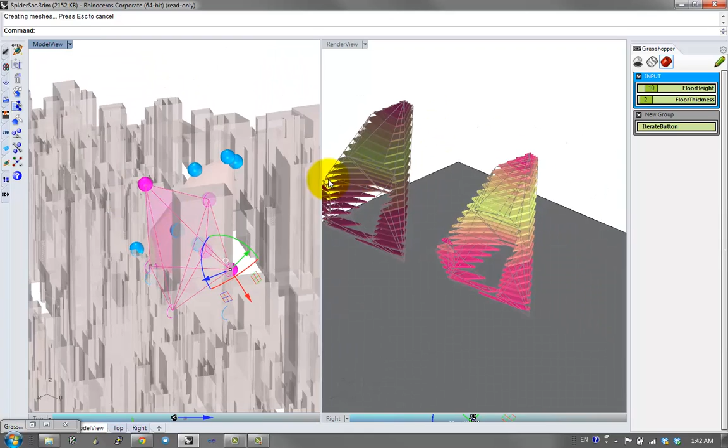Is that more of a void? And let's say, oh, that's interesting. And I can iterate onto it. I've baked and moved over. And so now, while I'm designing, I can see what I did before and kind of compare and contrast. Say, okay, I need more of a floor plate, and so on and so forth.

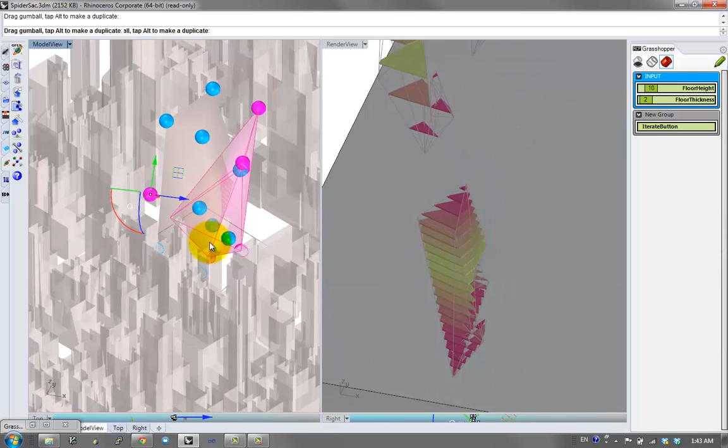Again, my computer's a little slow because the screen recording software I'm using seems to be an incredible memory hog. But I think you get the general point of the idea. And this is kind of fun, so I'll click on iterate again and grab another version.

Now, the nice thing about this is, again, I'm seeing progress. I'm seeing past and previous progress. I can make many different versions and kind of save them and showcase them. And I'm also doing a kind of representation, so I can very easily export this or review my previous processes.

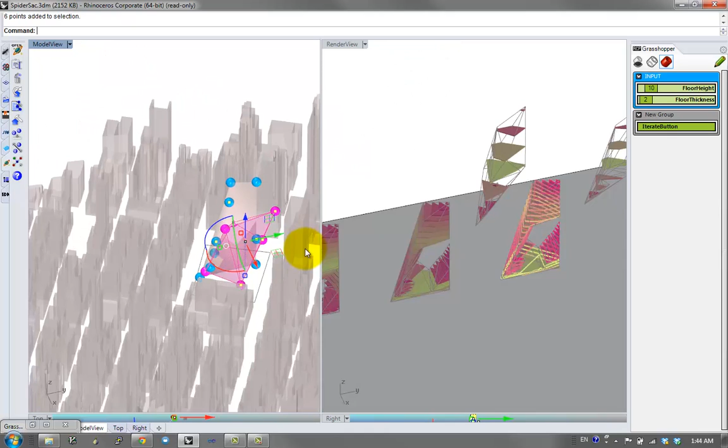And I think oftentimes when you're working with so-called parametric or tool-based architecture or design processes, one of the major disadvantages is that you're busy moving the sliders around, you're not sure what you did before, and it's a little bit hard to record progress, which is too bad. And this way is both a tool to represent and a tool to create. You get the idea.

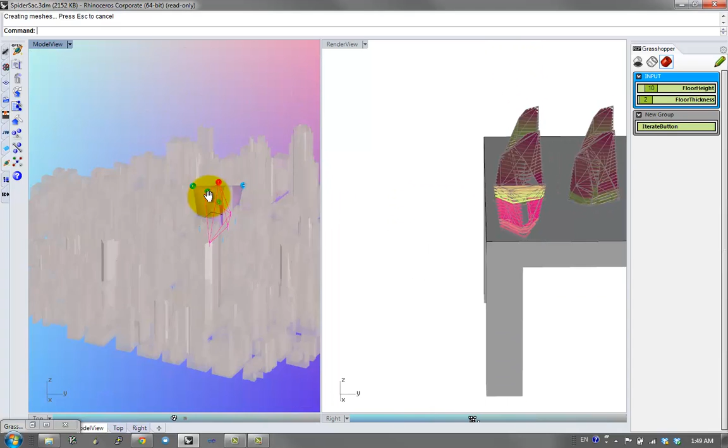And so if you play around with the table a little bit more, you can get this kind of view. And then if you turn off Grasshopper altogether, and if you also turn off the timer, then you can later get this kind of table on which you've placed a lot of different models. And I think this kind of analysis is pretty interesting.

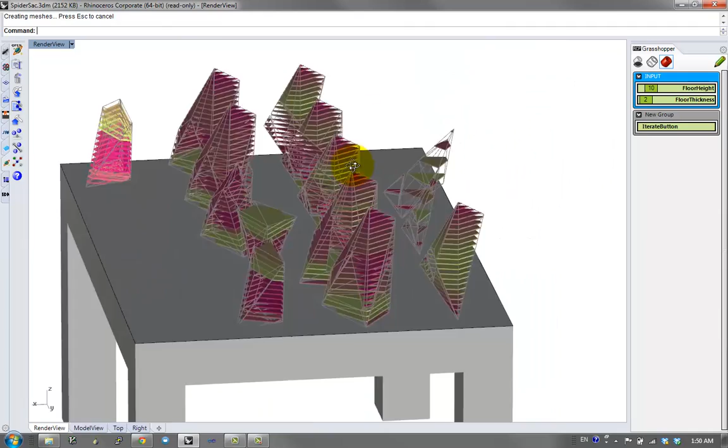For one, it's something that we're used to doing in physical models, but being able to display objects like these on a table is kind of like the sync camera tool or the custom preview. It won't change the operation of the tool. The SpiderSac thing here is ultimately the same, but it really does change what you see and what you're doing. So for example, as I iterated, I realized that all my objects were flat side down, pointing side up, so I turned it upside down.

That was only really possible because I was comparing between all of these things, and I can continue to see through this kind of data analysis, color coding, what I've been doing, which is to say, oh, I've been making all these holes or apertures. Maybe I should be doing some other kind of strategy. And you can imagine taking a screenshot directly, or a Make2D won't be that bad. You can imagine even rendering this out in V-Ray, or incorporating it into some other workflow in order to work within representation.

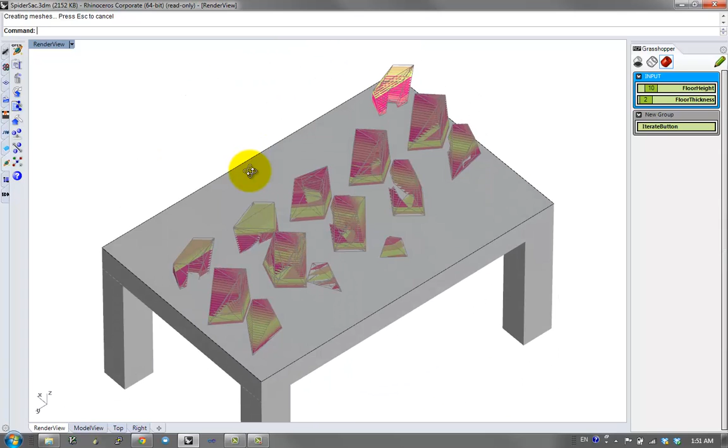So strategies like this are exactly, I think, something to think about in relation to how the tool represents itself. What is it showing? What kind of data is it showing? What kind of geometry is it showing? How is it showing the data that it's showing? Is it color coding or is it comparing? And how can you contrast these things together? How can you think about either lines or weights or emphasis?

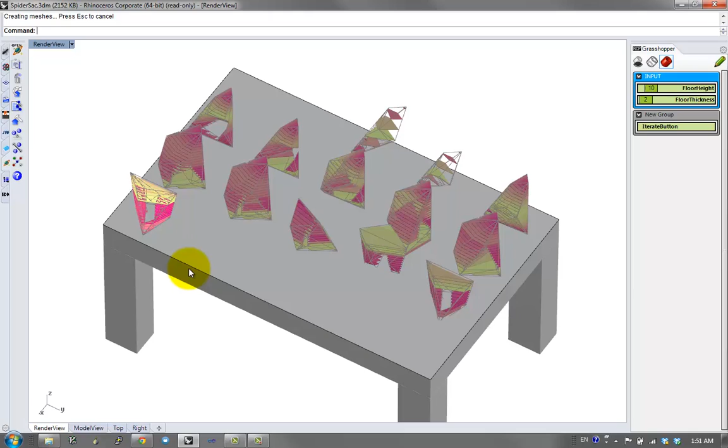Because with all forms of data analysis, the crucial point is that there are certain forms of data, certain conclusions to make. In this, I've created this form and I've done this analysis. And I'm highlighting the yellow bands in which maybe there's a lot of different programs possible. Assume this is, say, a mixed-use office building. The yellow bands are a kind of open plan office area, and the reddish bands are smaller, programmatically different areas.

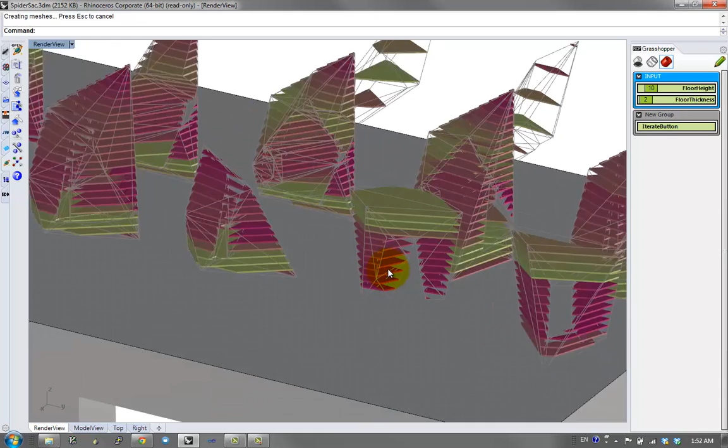And it's through this tool that I can then start to play with new possible formations. For example, let's say my building wanted to be an office commune, and I wanted large open areas surrounded or connected by smaller private areas. This is exactly the kind of analytic tool I would want to use in order to easily visualize and represent that kind of program.